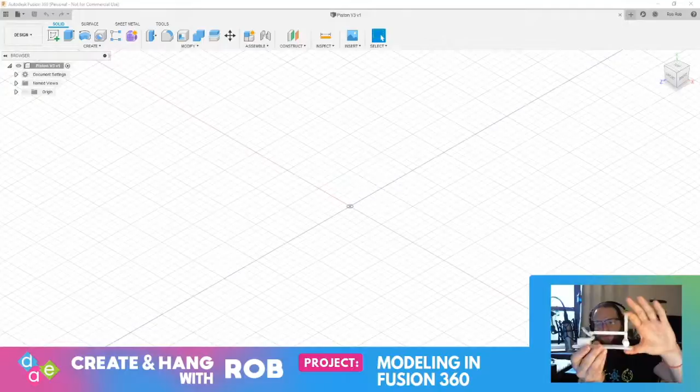If you weren't here on Tuesday, I'll quickly show you the linkage arm project I had done. I 3D printed it, and that worked quite well, as you can see. The only thing is, of course, I didn't leave any tolerances for the pins on all the hinges, so not all the hinges work properly.

Like this linkage arm can come off. The pins that were supposed to hold that in place don't fit. The pin for the hinge on the little box didn't fit. I tried to drill it out and then hammered it, and it broke. Only one side of it is in, the other side of the hinge comes loose. But overall, it works pretty well, and I'm pretty darn happy with that.

So I just wanted to share that with you. But I completed that on the first try. I'm on my third try of trying to get this piston mechanism to work.

If you can see on my screen, it says Piston version 3, because yeah, this is pushing my skills a little bit. So we're going to try again. I have a new idea. On Tuesday, I had tried to put this together and just did not think through the design very carefully, and it was completely wrong. I mean, the design was terrible. There's no way in a million years it would have worked.

I have an idea for today. I think we'll be successful.

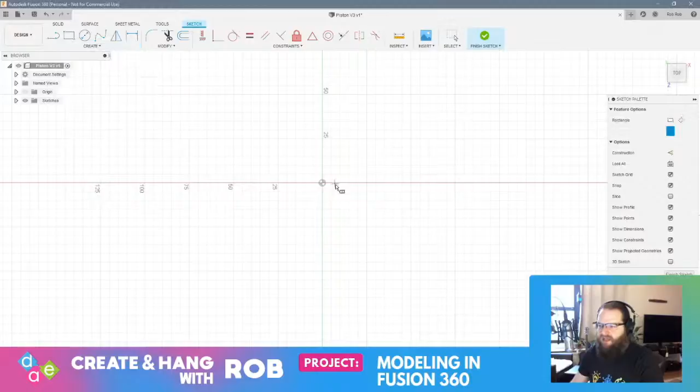So we're just going to get started with a center point rectangle, and we'll do 200 - well, actually, we'll do that as 50, and the other is 200. I want it in this orientation. Okay, perfect. And then what we're going to do is actually round off the edges with circles this time instead of doing it with the arc tool, so I know it's perfectly rounded. That's just another way of doing the same thing that I was doing with the arc tool. But all right, we'll press pull this 5 millimeters.

One thing I learned last time that's really interesting is the press pull tool doesn't just extrude. If you hover over the icon, it says press pull modifies existing geometry using offset, extrude, or fillet. So depending on the geometry of the object, push pull may not necessarily extrude—it may offset the face or fillet the edge, which is interesting. There's actually a separate extrude tool in the create set of tools, so I'll probably use those interchangeably. Extrude will only extrude, whereas push-pull can modify it in other ways. I did not know that, and I don't know if that was always the case, but I thought it was pretty interesting.

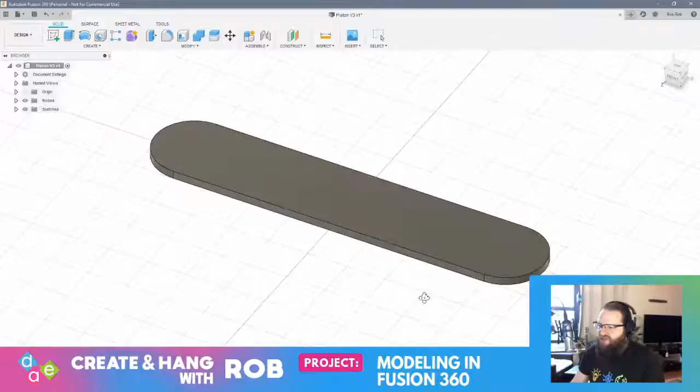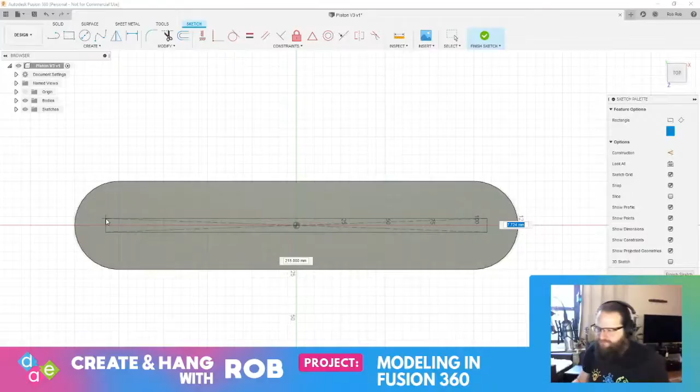So to start, I'm going to do something kind of strange, solely for orientation. I want the linkage arm dead center on this base, with everything else offset. So I'm going to create a sketch on the top of this object using a center point rectangle, basically making a guide. Let me grab my ruler to figure out the size of this linkage—probably 5 millimeters wide in one direction, and 215 in the other. I'm not actually going to use this for anything else; I'll just push-pull this upward about 1 millimeter so I have a guide for measuring everything else. Later I'll push-pull it back down into the base so you won't even see it. Essentially, I need my linkage sitting here, which is great.

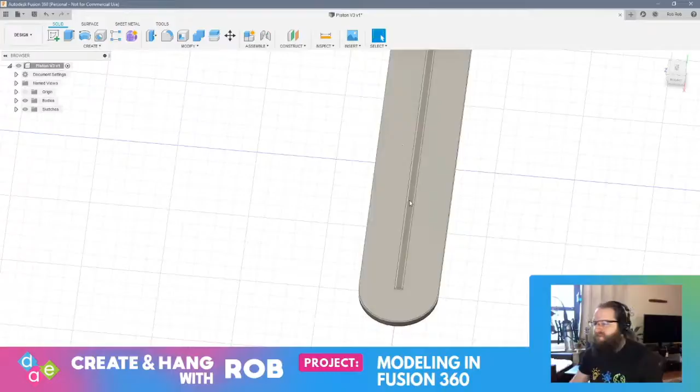The next thing is figuring out how thick I want the wheel to be and my crank. Basically, the wheel will be offset, and this linkage arm will connect to the wheel. This base is 50 millimeters wide, and this piece is 5 millimeters wide, which means we have 45 millimeters to work with on either side—though it'll actually be nothing on this side. I could have offset this and added another linkage, but that seems too complicated. So, 45 millimeters means I could probably make the wheel dead center on this section, 20 millimeters in width. I think that's what we'll do.

Let's get a sketch going here. Oh, my orientation's all weird. Let's get a rectangle—I think I'll sketch a rectangle, that's 20, right? And then 30, what does that look like? So maybe I'll do 20 by 50. That's kind of large, I don't know about that. Let me do 30. I don't know—I don't exactly know what I'm doing right now, I'm just flying by the seat of my pants as usual.

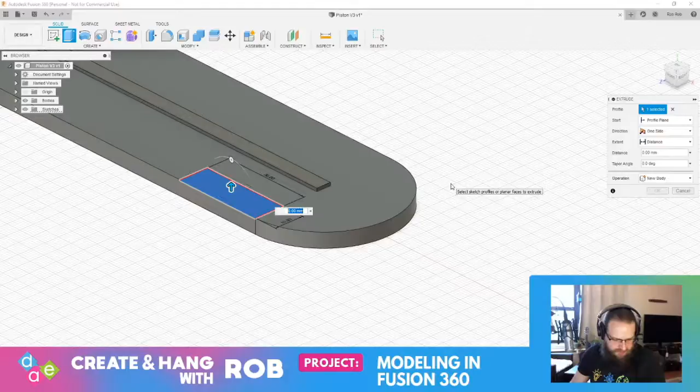All right, here's what we're going to do—change in plans. I am going to make it 10 by 30, and push-pull this upward. I think I want the diameter of that wheel to be 50, so we'll push-pull this up 30, right?

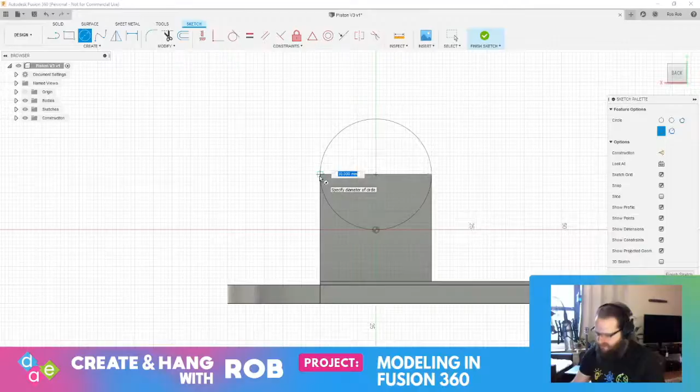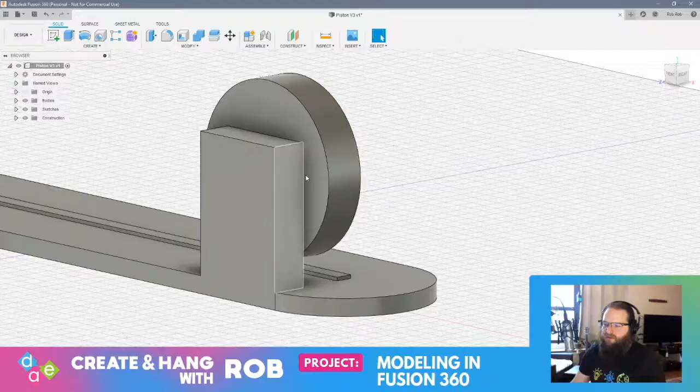Let's bring this out now—10, and I'll press pull this upward. I'm just doing these for visuals, so I can figure out how much space I have. Let's bring that out 12—that's intersecting, so we'll do 11.5, so we have some tolerances. Okay great, so now this can go back down. All right, we should be good here. I'm going to bring this up a bit more as well—let's bring that up 35. Okay, 40. Okay, cool.

Oh, wait a minute—this isn't going to work either. Okay, let's back up. I need a crank to be on this side, and the crank is going to hit the support. So I need to make a cylinder that has a split down the middle, and the support for it is going to be in the middle. That's what's going to have to happen here.

This one is really throwing me for a loop. Let's take a step back. It's a good idea, it's not going to work. Okay, so what we're going to do in that case... it's all right, we'll make this work.

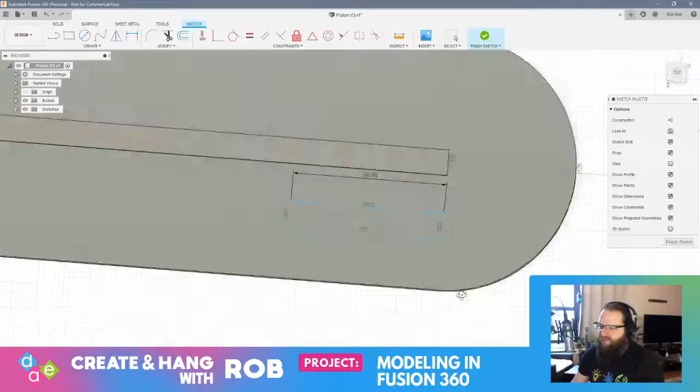So my thought is now, let's make a sketch here. 5 by 30. Okay, cool. And so that's 5 millimeters. Let's press-pull that up 40.

Okay, great. So now, here's what we're going to do. I'm super overcomplicating this design, but I don't really know how else to deal with this. There's probably going to be a version 4 and 5 of this. I have another thought of how we can fix this later on, but we're going to figure this out now. So I think what we'll do is...

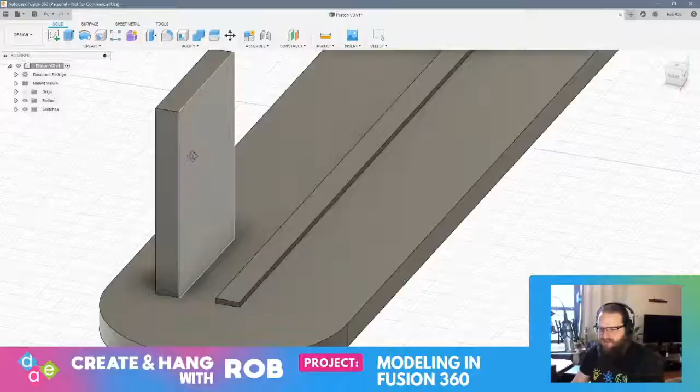Actually, hold on a minute, I'm going to undo that really quickly. Center point rectangle. Actually, maybe we'll redo that. I'll just go with it. Okay, cool. All right, so now what I need to do...

I'm going to just do something here and see if this works. This is challenging. Oh, center point.

Ooh, I should have eaten something this morning. My stomach's grumbling, that's funny. I don't know if y'all heard that, that was pretty loud.

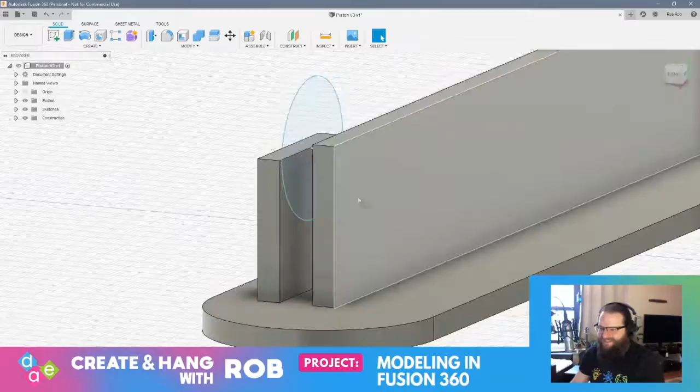All right, let's see. 6.5? Okay, that'll work. Okay.

All right, so, what was it? Oh wait, hold on a second, I need to edit the sketch. I made this too small. Let's undo that.

That's what I needed. Okay, and then I think I press-pulled that 6.5. I remember that from before. So let's see, press-pull, 6.5. Okay. All right, very good. Okay, so now this needs to come up.

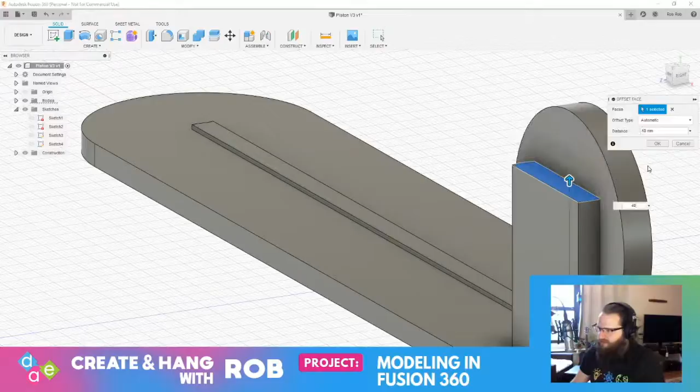Let's bring that up 50. Nope, too much. Let's bring it up 40. 40, cool. All right, so now what I'm going to do...

I am going to... let's see.

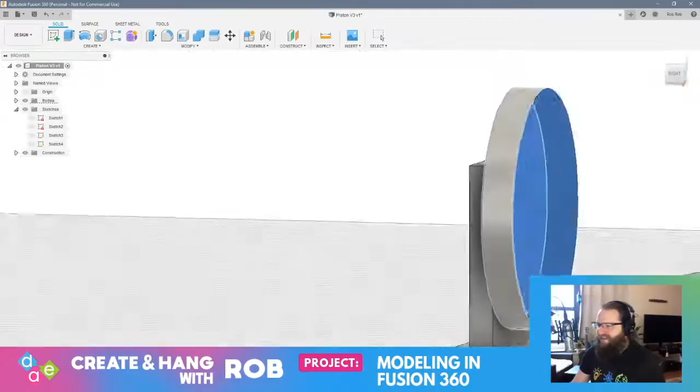I need to make an identical wheel on the other side, and then I need a system of connecting this all together. I think what I will probably do is make a sketch. Okay, here's what we're going to do. We're going to make a sketch on this face, right? And I'm actually going to turn this sketch back on so I can get the center point of this circle.

And we're going to make a 10 millimeter hole in this, okay? And actually, we're going to make it 10.5, because we need to model with tolerance and not be stupid like I usually am and model everything 100% to scale. Minus 5, I think that's all the way through, right? I think that's all the way through. Let's take a look, I'm just going to move this. It is. Okay, great. All right, so now this should not be too hard.

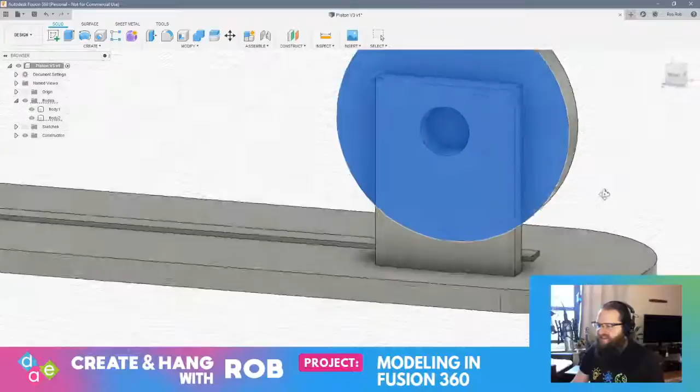So now what I'm going to do is I'm going to make a sketch on... let's shut this sketch off. I'm going to make a sketch on this face of this shape. And yep, we're going to sketch there. And then we're going to use the center point circle and make a 10 millimeter circle. And then we'll be able to pull that.

Finish sketch, let's turn the sketches back on. Now I'll be able to take this shape, this face rather, if I can select it, press pull this. That will work. All right, beautiful. Okay, great, so that's good. So now this body should contain that. Very good. Okay, awesome, so now we're going to use the...

Actually, I have an idea here. Let's sketch this. Center point circle, and we'll do a 5 millimeter circle. Actually, we'll do 5.5 because we need to leave a tolerance. And then I'm going to press pull this, minus 6. Right? So now we have...

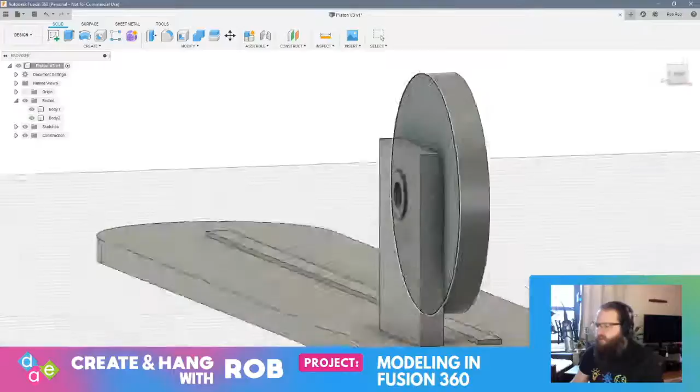Essentially, what we're starting to make is the same pin mechanism that we've used for our hinges. And... you know, wait a minute. Let's stick with this plan. I'm going to stick with this. Okay, cool.

So here's what we're going to do now. All right, we're going to make a sketch of a 50 millimeter circle. And I'm going to press pull that, whatever I press pulled this, which I think was 6.5, so they're even.

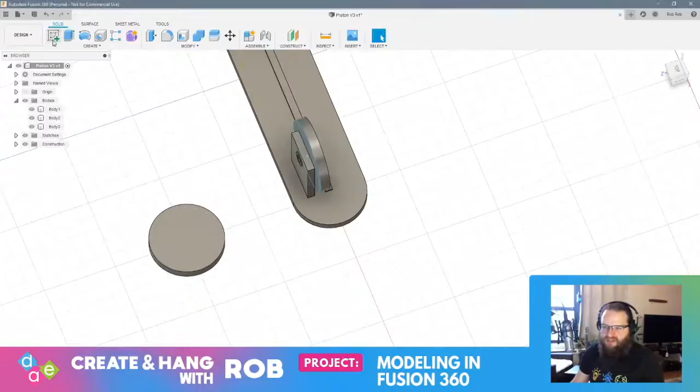All right, and then I'm going to sketch on top of this. And then we're going to make a center point circle that's 5 millimeters in diameter. And then we're going to press pull that 6 upwards.

And so now what I should be able to do is align this edge with this edge and then basically press it inwards. So let's do that. Let me just move this up and rotate it. Okay, I think we're making a bit of progress.

I'm going to have a wheel on either side of that support. One's going to have the linkage, and the other's going to have a crank on the opposite side that you'll be able to turn by hand. I could probably set it up where there's a wheel, the support, and then just a crank on the other side without the other wheel. That's probably a more efficient design, but I want to see this one through first and see if it makes any sense.

We're probably going to go through a few iterations of this. I probably won't torture you all with sticking through every version of this, but we're going to at least try and put this to bed today. And as I make iterations of this, I'll print them and show you all.

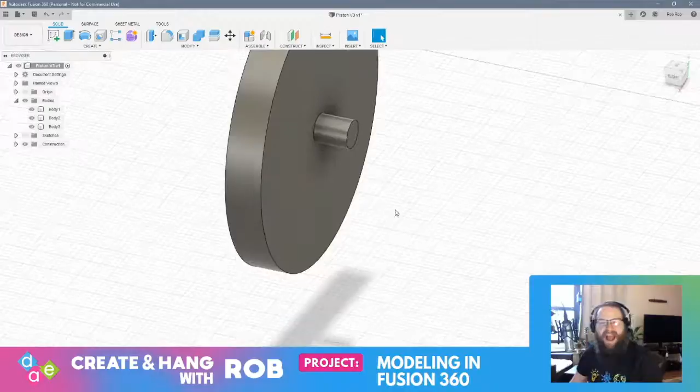So we need to use our alignment tool to get the center point here with the center point here. There, okay, very good. Okay, and now that's good. And now we can take this and we can move that in.

Too much. Negative, I think 5.5. It could sit all the way flush, but I'm just going to leave it for now. Actually, let's get that in just a bit more.

All right, cool, awesome. So there's our wheel. Cool, awesome, and the hinge design works. So now we'll be able to have a crank on this side that moves completely freely and won't get hit by anything, and a linkage on this side that moves completely freely and won't get hit by anything either. So I feel pretty good about that.

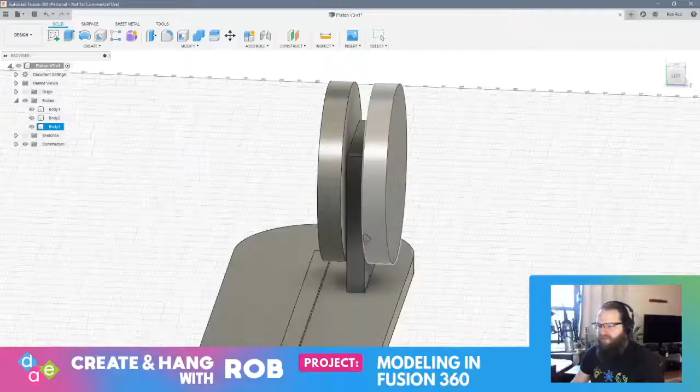The only thing that I probably messed up is... yeah, this might be a problem. No, this isn't going to be a problem, this will be fine. I was thinking how we were going to attach the linkage arm to this wheel. Essentially what I think I'll do is I'll actually pull a pin out, and then the linkage will fit on that, and then it'll have a cap to hold it in place. And that way nothing will obstruct the inside of this.

So save this, looking good so far. Let me just grab a swig of water. All right, let's continue on.

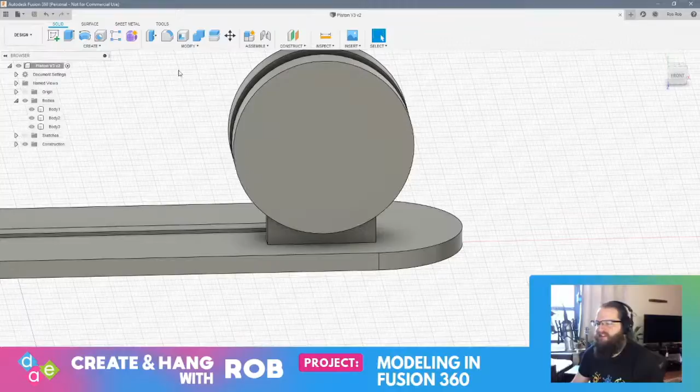So I think let's make the crank, and I'm just going to make it on this end. I don't think it's going to be anything fancy. Yeah, it's not going to be anything fancy. I'm just going to have a little cylinder coming out of this with maybe like a little ball on the end. That's all, I don't want anything too fancy.

So let's make the cylinder here. We'll make it... that's too close to the edge. I think I want to make it 10 mil in diameter, so we'll do it. I'll make it 5 mil, whatever. Or, you know what, I don't know why I'm going crazy with this. Let's just make it 8 mil.

That's fine, and then we'll have that come out. Let's have that come out. I'm just looking at my ruler here. 30 mil. Right, little crank. And just for fun, we'll throw a little sphere on the end of it, right, just like that.

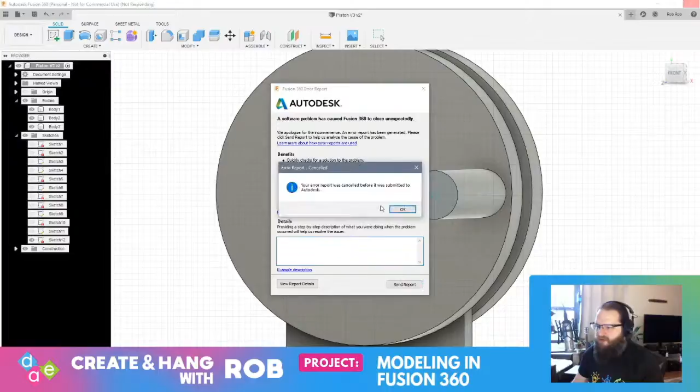What's happening, Fusion? Oh, error report. Oh, okay, Fusion 360 crashed. That's nice. Let's get Fusion 360 back open. That's never happened to me before. Interesting. All right, these things happen.

I wonder why, you know, I have Premiere open. Maybe I'm... let me close Premiere. Yeah, all right, we'll go back to Fusion here.

All right, close. Okay, so let's open our design. We should have it, that was Piston version 3. We should not have lost anything because I did save it right away. Just a good lesson in making sure you save everything all the time.

All right, let's try this again. Save it again. That is so perplexing. When I used the sphere tool, I had an issue. All right.

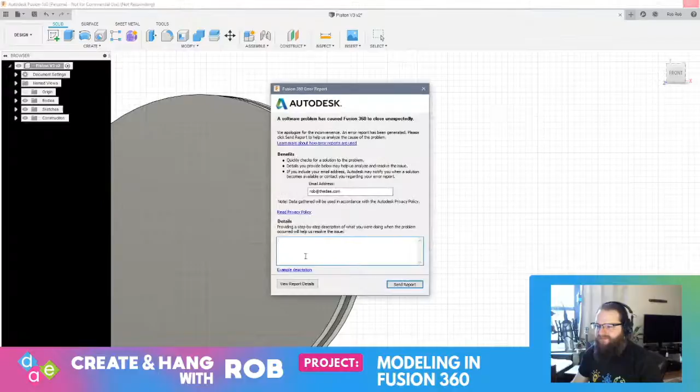All right, let's try this one more time. All right, so we'll bring that out 30. All right, let's try the sphere tool again and see if we have a crash. If we do, it's going to crash again, watch. Yep, send report, all right. That's so weird, using the sphere tool is crashing Fusion 360.

I don't think that's anything in my model, my model isn't particularly complicated. I don't know what this is. Okay, all right, oh, it's just a confirmation that I sent an error report. Okay, let's let this close, and then we'll reopen Fusion, and let's see what happens. That is so weird.

All right, so note to self, no sphere tool for today. Let's go ahead and reopen our file, and hopefully this doesn't continue to happen. So, Piston version 3.

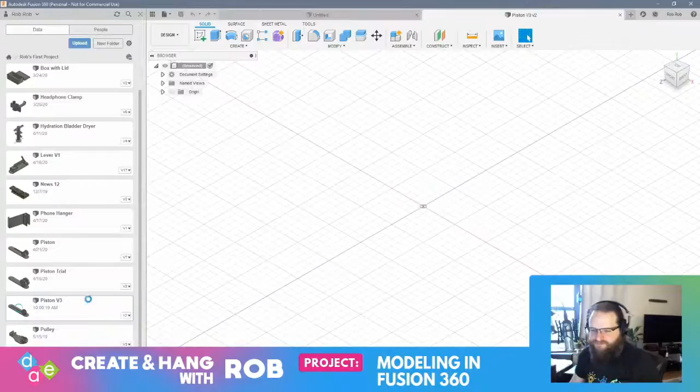Okay, so what we'll do in this case then, to just make the little crank look nice, we will just fillet the edge. That's so perplexing.

So perplexing. All right, so we'll bring that out to 30. For the time being, I'm just going to leave it. That looks entirely too long, by the way. Let's bring that in to 25. All right, fine, that's good. That's fine for now, I'm okay with it.

Great, so now I think it's time to work on the linkage. I think the linkage arm is going to be... I was going to make it 5 mil, but maybe I'll make it 10 mil. Maybe that makes more sense, and then we can make the pin that goes through at 5. Why don't we do that?

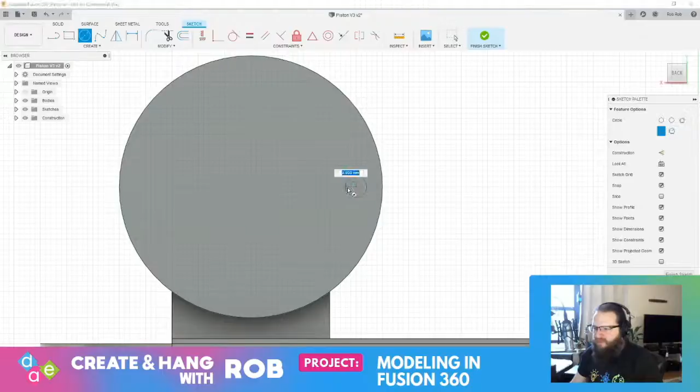So we're going to sketch on this side. I think I have an idea of how this is going to work. We're going to make a 5 mil piece here, and then we're going to press pull this out. I'm going to press pull this out 6. I think that'll be fine. Okay, great.

All right, and now I'm actually going to get rid of this. I don't need this anymore. -1, all right, fine, that's gone. We don't care about it anymore. I don't know, that was weird.

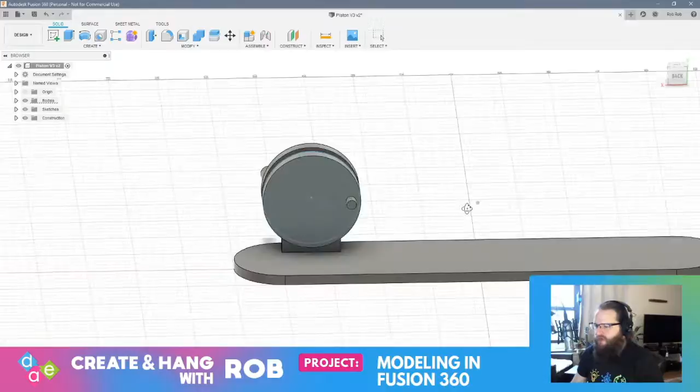Okay, so let's make our linkage arm. I don't know how long it needs to be, but we'll figure that out. So let's save this, and let's get this going. I'm going to sketch down on the... nope, that's not the right plane I want to sketch on. Okay, so let's go ahead, I'm just going to make a basic rectangle. It's going to be 10 by, I don't know, 100 for now. We can change the size of it as we need.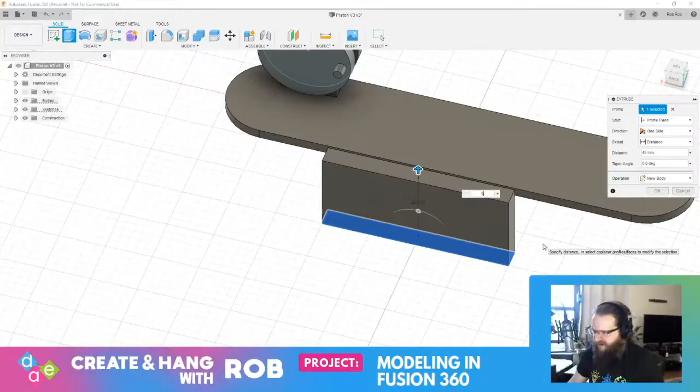Okay, and then we will press pull this and make it 5 mil in, not 45, but 5 mil. Right, great, and then I want to sketch on top of this, and then I want to make a hole. It's going to be 5.5. Great, and that's going to get pushed through so we have a hole. It's going to be nothing fancy about this linkage, but it's going to work. I know that for a fact because it worked really well on my little box mechanism, the lever box mechanism. Okay, all right, great, so that's there.

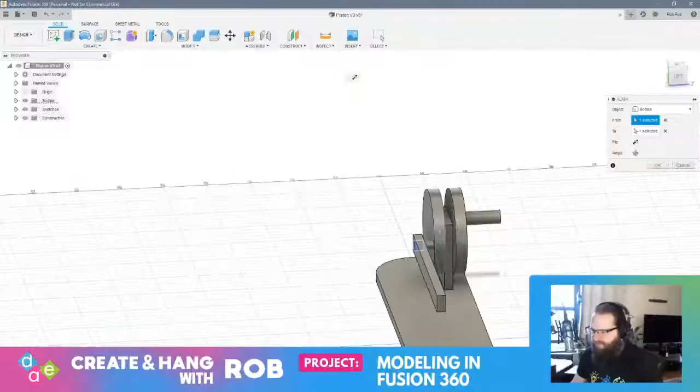Let's move this up and rotate it the right direction. All right, and now what we're going to do is align the center point of this circle with the center point of this circle. And there we are, beautiful. Okay, so that's good, now we can grab this. And of course I should be naming all this, but I'm not. 5 mil in, let's bring it 5.5 in.

Great, okay, awesome, so there's my linkage. I'm going to actually rotate this so it's all... because it's going to basically come down at an angle and hook up to something here. But for the time being, let's get the pin that's going to hold this into place set up.

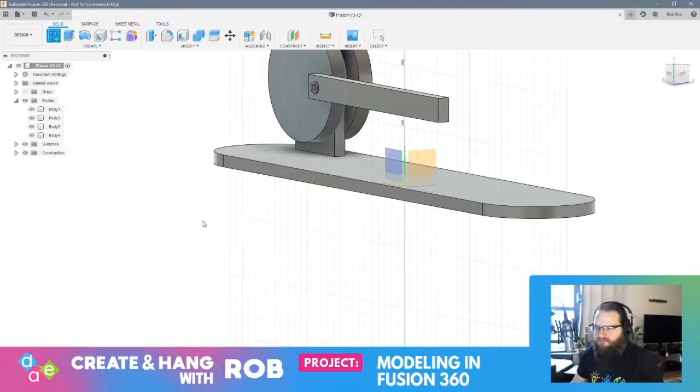So we're going to sketch on this face and make a center point circle, and we'll make a 3 millimeter, and we'll have this go in 5 millimeters. -5, there we are, okay, so now we've got a little spot there. So let's design a pin. This is something I've done 100 times, and I should not have too much of a challenge. I'm not sketching in the right place. There we are, okay, so we'll put the pin on this side. All right, let's see, let's see what we got.

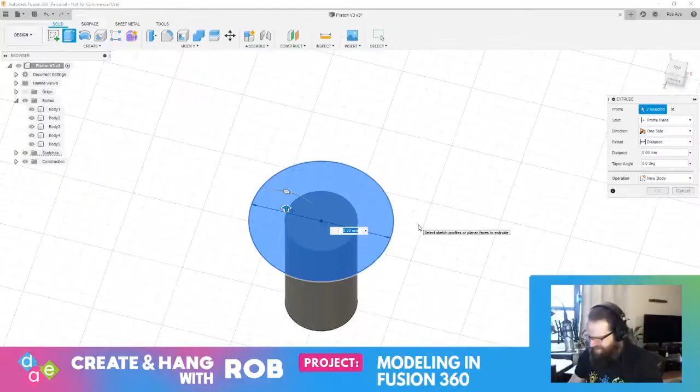We made that 3, so we should make the inner diameter of that 2.5. So I'll make a 2.5 mil pin, and we will press pull that up 5. And then we'll make a sketch on top of that, and we'll use a center point circle as always. We'll do a 5 mil top to this pin, and we can grab both these faces and come on now. Press pull, and we will make this, I think 3, nope, we'll make it 2. And then, of course, we will fillet the edge 1, and we've got a pin.

Beautiful. Let's get this into place so we can see how it looks, and then we'll move on to the next thing. I also think I want to round off this using an arc, but we'll get there in a minute. So first things first, let's get this pin oriented correctly. So let's bring it up and rotate it 90 degrees.

Great, and now we can use our Align tool. I don't know how I survived working in Fusion 360 without the Align tool. I mean, it's necessary. It's not knowing what I'm doing. Great, looks like our tolerances are good. All right, we're going to move this in.

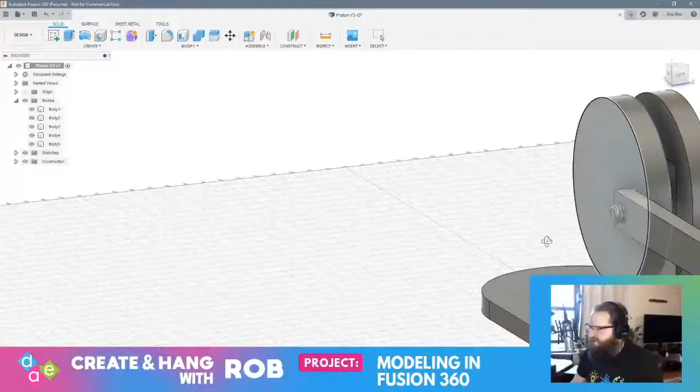There it is. So, one issue that I overlooked, very stupid. Look at the diameter of that pin, the arm is going to fall right off. I should have made it... I should have made the top of it 10 mil. So let's edit the sketches. We should be able to edit the sketches and not have a problem. So let's see, so if I just shut all these other sketches off.

Let's try this one. Let's edit this sketch. So the top of this needs to be 10 mil. Finish sketch. Let's see if that updated this accordingly. Oh yeah, how cool is that? Is Fusion 360 the best? All I needed to do was update the sketch, and it completely updated my model.

Love that. If I was doing this in Tinkercad, I would have had to go back and ungroup everything. It's just not even the same thing.

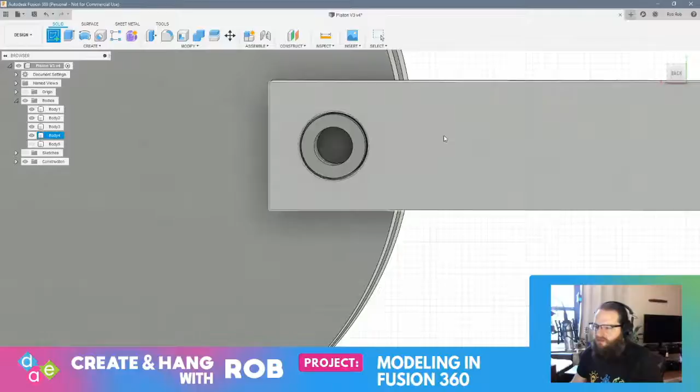So I want to just curve the edge of this because I want it to look nice. Let's do that with the arc tool. We're going to get our 3-point arc. Let's see how we're doing on time here. Oh, we're doing great. There it is. Finish that sketch.

Let's get that sketch turned on. And then basically we just need to press pull this way. Beautiful. And now if we turn our pin back on, I think that looks pretty nice. I think that looks great. Okay, very good.

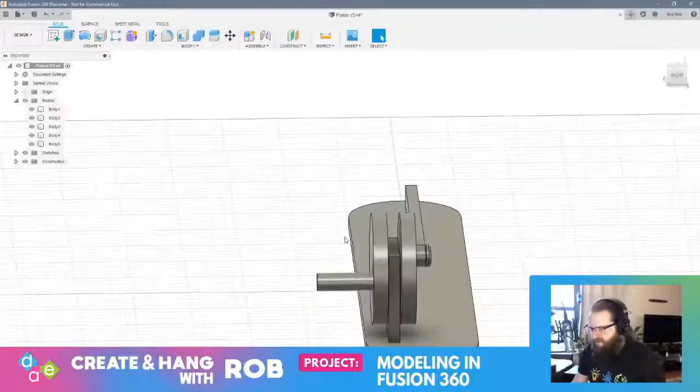So, offset crank. This crank turns, that turns the wheel. This arm can rotate freely around this pin because we've modeled it with tolerances and there should be very little friction. Now what we're going to need to do is figure out the piston side of things. And I have absolutely no idea how that's going to work.

So I think we need to save this with a description so I can come back to it. We're going to call this crank complete. So that if I royally mess up the piston, which I guarantee I will, I'll be able to come back and jump back to this point and we can give it another shot.

Okay, so first things first. I think I want to extend this arm. I'm going to need to rotate it. I guess I should figure out what the piston's going to look like before I do anything with the linkage. So I'm actually going to pull this back a bit and just get it out of the way, and we'll deal with that later.

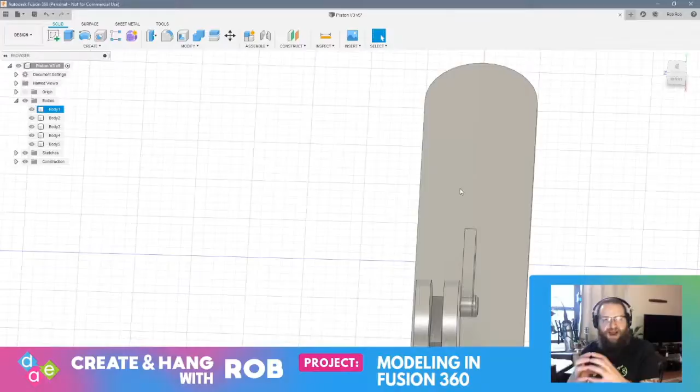So the piston is going to need to be dead center, and it's going to need a housing, right? The piston needs to be within a housing, otherwise it's just going to flop around. So I think what we'll probably do is make like a tube of some kind that's on a little stand, and then we'll put the piston inside of it and hook up the linkage arm.

Okay, and I think the piston has to be kind of large in diameter, because if we think about it, well, I don't know. I really don't know. I have no idea. So let's just start playing around with this and see what we can do.

So we need to make a sketch on here. And I think maybe what I'll do is create a rectangle that will be, let's call it 20 by 75. I don't know. Okay, finish this sketch. All right, and let's bring this up like 5 mil.

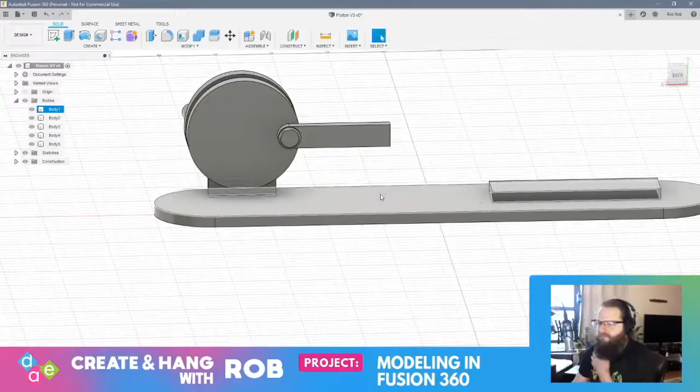Okay, now, because I'm thinking that the piston's going to travel a bit of distance given the diameter of this circle. The diameter of the circle, I think I said, is 50. So there's basically 50 mil of travel. Because if you think about it, from this point to this point, this will be the piston all the way at the top, and over here will be the piston all the way at the bottom of its stroke. So it should be 50 mil of travel.

So this probably is bigger than it needs to be, but it's fine because I can actually press pull this negative 25, right? And now that should represent—although I'm not going to do that. Let me leave it the way it is for now.

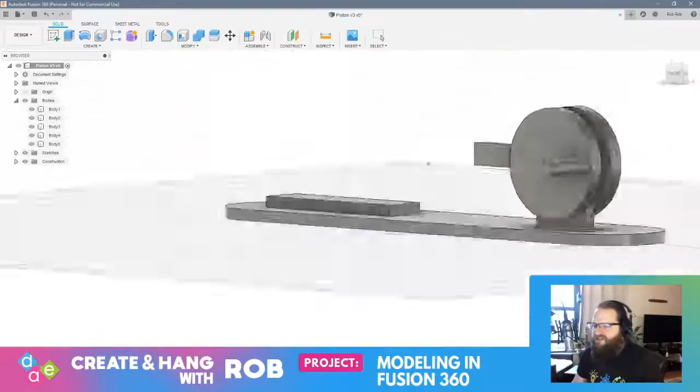So I think we need to design a tube that the piston will sit in. The way I think we're going to do that, let's sketch on this face, right? And I think I want the piston to be, I don't know, that looks close. I have no idea.

50 millimeters, like a 40 piston, 40 millimeters in diameter. That seems kind of large. I think like 25 is better. So, 30. Okay, finish sketch, right? So now I can basically press pull this.

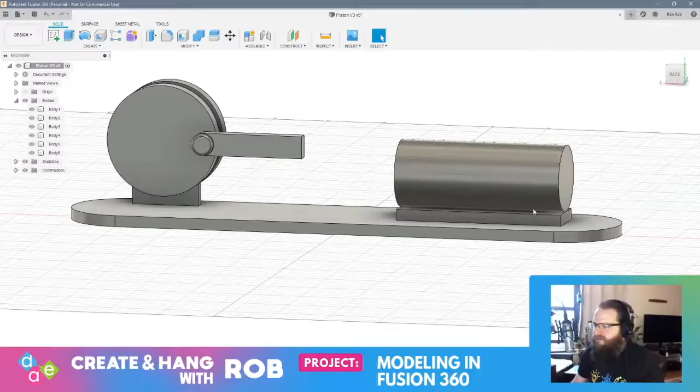This direction 75. Okay, and then I can make a circle in here. 25.5, right? And then we can press pull this, right? So now essentially we have basically like a tube that the piston is going to sit in.

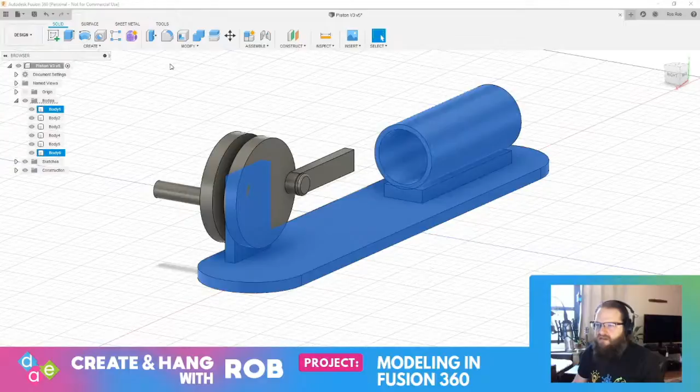Right, and I feel like maybe I want to press pull this up one. Right, so they're like sitting together. Let's group these two things together. Oh, so this and this need to get grouped together. All right, let's combine. All right, cool. So that's now, I mean, who knows how well this is going to work, but all right.

So now we need to make... I almost think I messed this up. Let's take a step back for a minute here. I think we need...

When the piston is all the way forward, I think we want this to be completely level. And then it pulls back. Yeah.

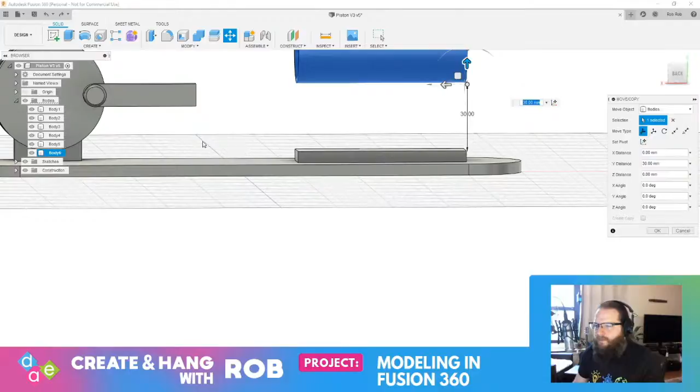So I feel like I need to bring this up. And I think I can figure that out. So 25... and I don't know. Let's see if we can figure this out. I know there's actually an easy way to do this.

Oh, I know what we can do. Let's use our alignment tool. So we'll basically grab the... oh, man. I can't grab the center point of this. Oh, come on.

Oh, bodies. Alright, no, that's not going to work, I don't think. Let's see. Oh, it did. Wow, look at that. Okay, so I basically now have this tube, right? All right.

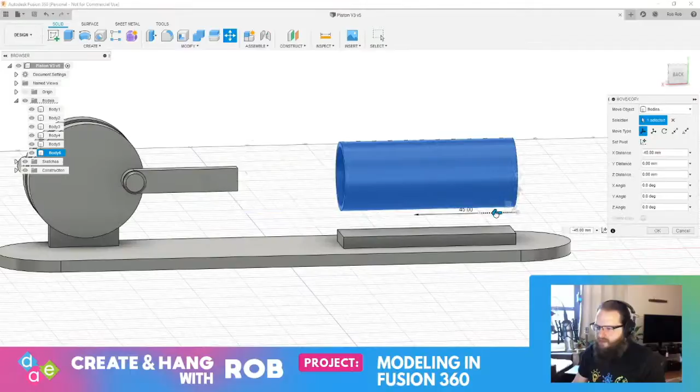Huh. Let's just save this. And then we can move this up. Right. And... oh, man.

I feel like the tube that the piston is sitting needs to flare out, almost like a bullhorn, because there's going to be this articulation of this linkage arm. And I think if this is so narrow, it's going to knock into it. So, I don't know.

Yeah, I'm not sure. I'm really not sure. The other thing I should have done is... I probably should have set this up with the piston all the way back. I don't know. I don't know.

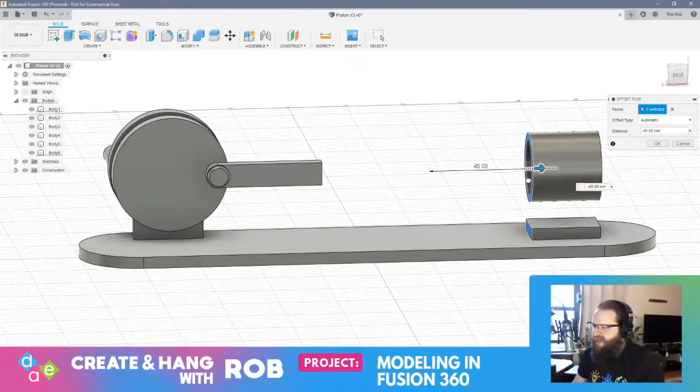What I'll do for the time being is get this out of the way. This is where I need to figure out how to simulate the motion, because if I was able to do that, it would make my life significantly easier. Because then I could actually demonstrate the motion and see if it actually works. One of these days I'll figure out how to do that.

So we're going to make a sketch. I'm not going to... I'm just going to make a sketch over here, sort of off to the side. And we're going to make a 25 mil piston, all right? The piston is just a cylinder. I'm not going to put any piston rings or anything of the sort. I think I said I was going to make it 50. Right? There's my piston.

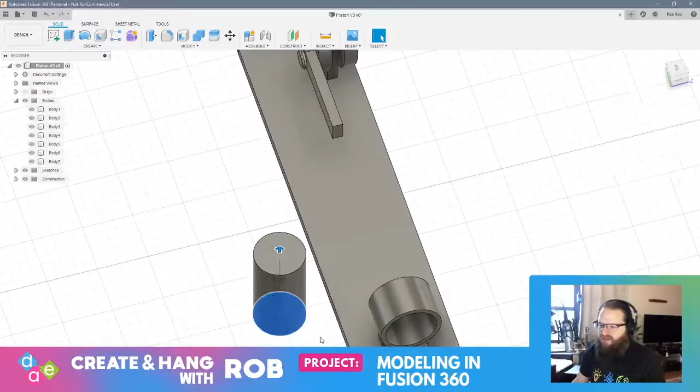Oh, you know what, actually? I'm going to redo something here. Awesome. Okay, so I think what I'm going to do is sketch on top of this and use... okay, I have a great idea for how this is going to work.

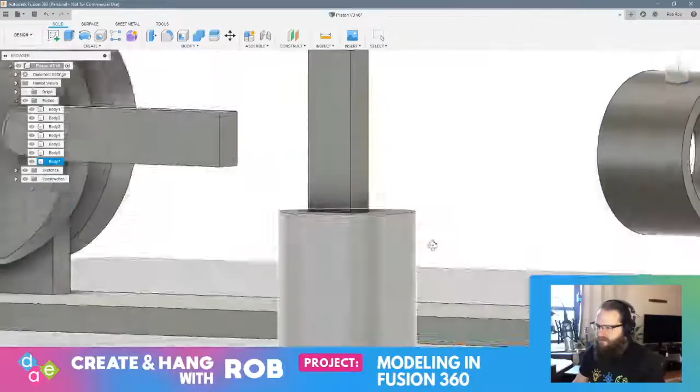So, 5 by 10. Okay, great. And then we can push-pull this. Maybe even more, let's make it 30. Start like that. Okay. So, let's see if this works. I mean, this is just an experiment for the time being. So,

Oh, wait a minute. All right, let's just see what happens here. This is going to need to be tweaked, I'm sure. Oh, I probably should analyze the construction of an engine a little bit more closely. But let's see what we can do here.

So, I'm going to start by aligning... how are we doing on time here? All right, we're getting there. This with the center point of this. Okay, cool, right? And there should be tolerance. I should have modeled - there should be a bit of tolerance here, so that's fine.

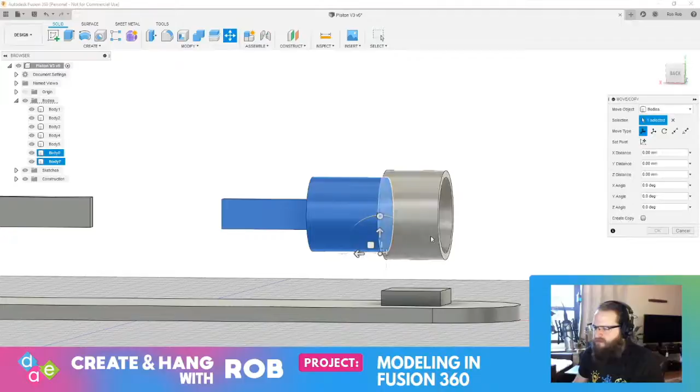All right, so now let's bring this object in. All right, so let's call that the top, right? And I think what we'll do is let's bring... yeah, I'm going to need to make a bunch of adjustments to this, which is fine. It's all good.

Whoa, I don't want to do that. Let's extrude instead of press pull. There we go. Okay.

Obviously, I messed something up in the connection of this. Obviously, I messed something up. So, I think I need to scooch this linkage over a little bit.

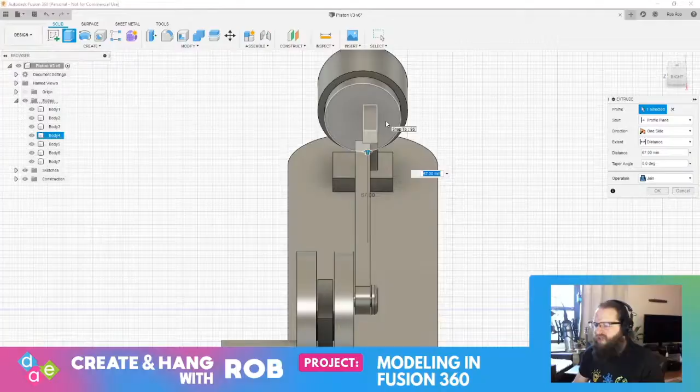Yeah, let's take a step back. All right, yeah, so this drawing needs to get scooched over a little bit more. So it was here. I think it needs to be here. Right? Let's see if that works.

Just gonna make it 20 for now. I mean, I don't know exactly what needs to happen. All right, let's move this again. Move, bring it up, rotate it. Okay.

We'll grab our center point here.

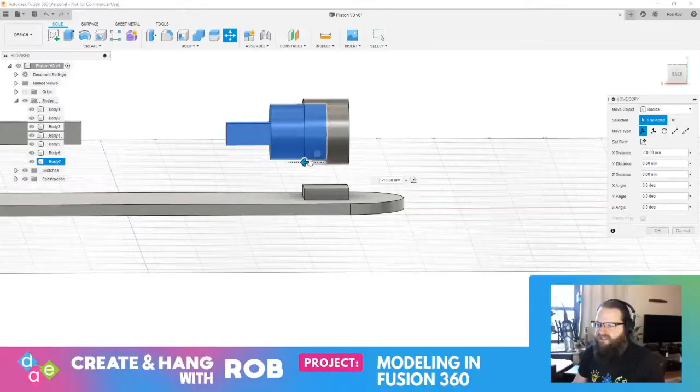Okay, cool, and now this... I'm going to extrude that, because when I press pulled it, everything got all out of whack.

Okay, so that's still not quite right. You know what, let's undo this. I'm not even going to do that sketch right now. Finish sketch. Let's get this all aligned first. Let's see if I can do this. Align this with this. Beautiful.

And now, all right, so I really should make... We know that this is 50, and I think I made this 25, so let's make this 50. No, I need to extrude. So I need to bring that out another 20. And we'll bring this edge out 5.

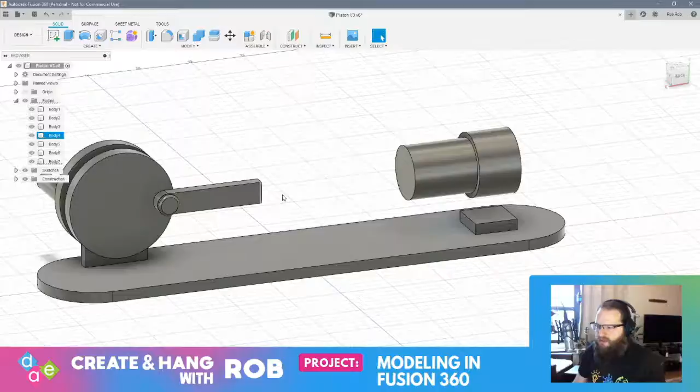Okay, great. All right, so now that should be... All right, let's bring this... No, I want to extrude this. Let's bring this out. Okay, cool. All right, so now that should work.

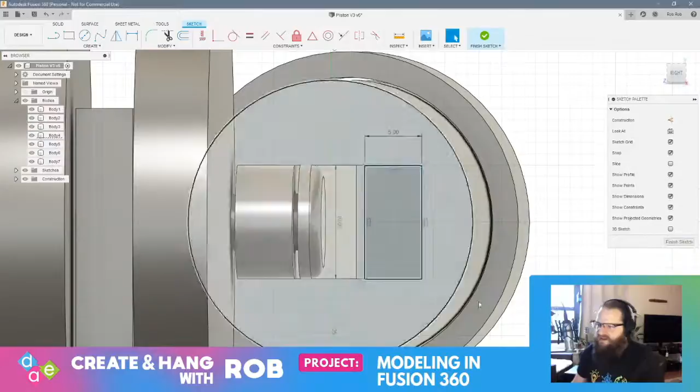Good. All right, so now what I'm going to do is sketch on this face. Right, and I'm going to sketch here and make a 10 by 5. Great. Finish sketch. And then this can get press pulled out minus 10. Nope, 10, wrong direction. Is that enough? Nope, let's bring it out 20. Beautiful.

Okay, so now I'm going to probably tidy some of this up shortly. 8.

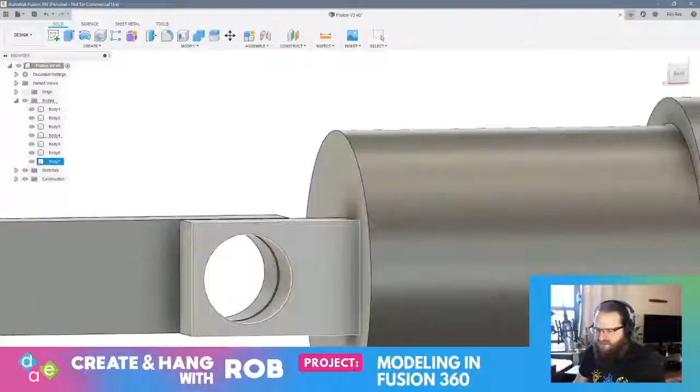All right, so now we have a hole through both of these. I'm actually going to extrude this so it comes back a little bit, it's too much material. Let's see. Okay, cool. And so now we'll design a pin mechanism to go through this, as we've done in the past. Great, great, great, great. Okay, so that's looking pretty good.

And then we'll figure out how this piston is going to be set up. I do think we're going to need to flare out the receiving tube for it, so just save this. Okay, let's see, we have about 10 minutes left here, so let's see if we can wrap this up. So let's create a new sketch.

Okay, we said that was 8, so we will make this 7.5. Okay, and I don't know how far that needs to go through. This is 5 and this is 5, and I think there's a millimeter in between, so we'll make it 11. So, 11.

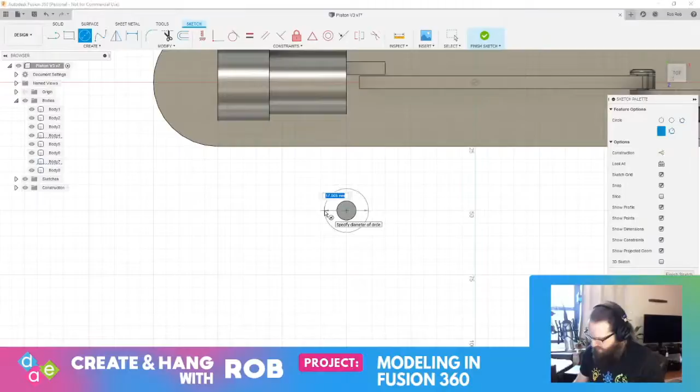Okay, and then let's sketch on top of this, and we'll make this 10. And once again, we'll make our pin mechanism 2. And then just flatten this off with our fillet tool, 1 millimeter. Done. Okay, great. So let's align this, and then I will do the other part.

And I think this should go... I don't think it really matters. It probably does, but for the time being, I don't think it really matters. Okay, cool. So let's align this with this. Cool, beautiful.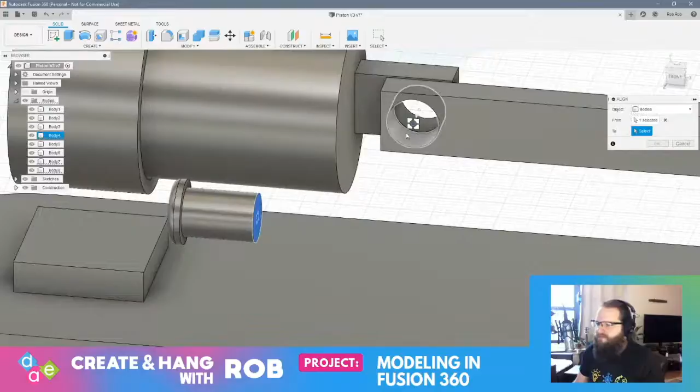Negative 10.5. All right, great. That looks pretty good. I'm going to just press pull this out, 0.5. There we are. Okay, beautiful. There's our linkage. Okay, this is coming together. This will probably function, but not well.

We'll do a 5 millimeter hole here and press pull that in. Negative 5. Okay, cool. So let's see what happens. Let me make a pin. New sketch.

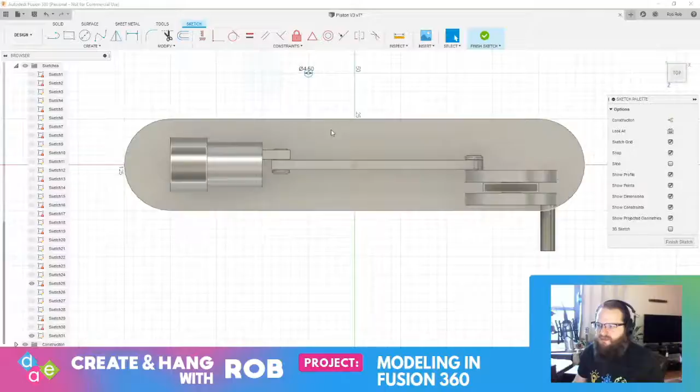Okay, I don't know why that sketch is on. Shut that off. All right, so this is going to be, we made it so it'll be 4.50. It'll be, whoa, it's not visible. That's dumb. I do dopey stuff sometimes. All right, so 5 millimeters.

Great, and then we'll do the same thing we did on the top. Sketch, center point circle, 10. Press pull that up, 2 millimeters. And then grab this outer edge and fillet by 1. Great, and we have our other side of our pin.

Let's go ahead and move this. 9. I'm going to have to go back and name all this at some point, but in the interest of time, because I'd like to get pretty close to finishing this up today, which I probably won't, we're going to move a little quickly. So 90 degrees, let's use our alignment tool. So align, I'm going to grab this and align it with this. There we are, great.

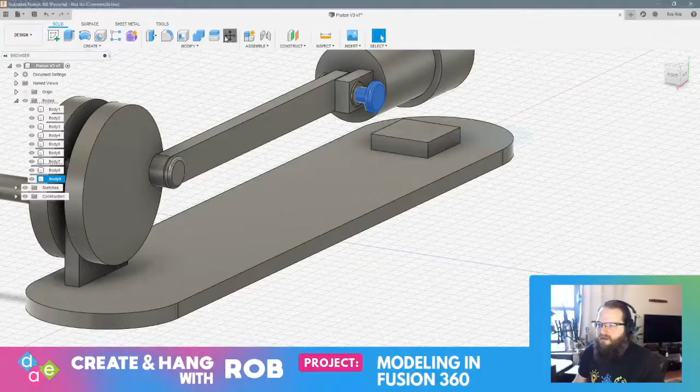And now we can move this in. All right, great. Okay, cool.

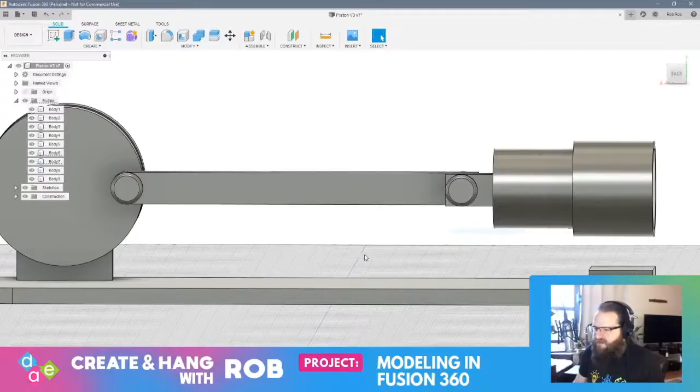All right, so I think what I'm going to do now, I do want to flare this out a little bit. So I think first thing I'm going to do is I'm going to extrude this back 5 millimeters, right? Okay, then I think what I'm going to do is... Oh man, I need to think about this a little bit more because I did some things wrong here. It's fine.

All right, cool. So we have to think that this is going to move 50 millimeters back this direction. So what I'm going to do... Let's actually bring this all the way back. Okay, cool. And then what I'm going to do, check this out, let's see if this works. Let's create an offset plane 50 millimeters back this way, right?

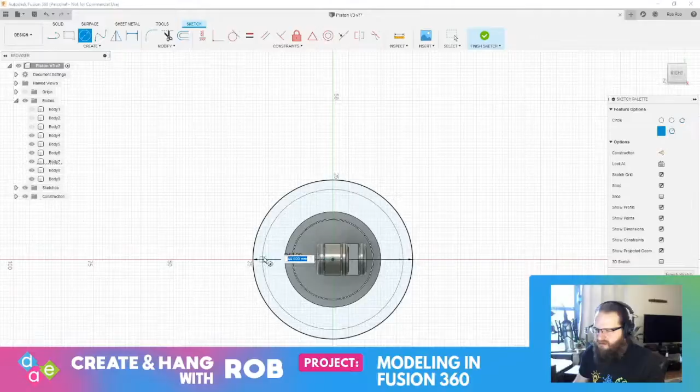Awesome, okay. And then I'm going to sketch on this new plane. I'm just going to shut a few things off. Center point circle. And a second center point circle. 45. Okay, great, that's a finished sketch. Okay, now the question is, can I select this and select this and use the loft feature. Profile 1, profile 2.

And profile 2. Cancel. Maybe this won't work. I thought this would have worked. But let's see.

There's another way to do this which I don't want to do, which is drawing arcs and using the revolve tool. I don't want to do that. I want to use loft and profile 1.

Loft cannot be changing the input, swapping profiles for rails or a center line. Okay. Center line. Cancel. All right, so let's try this again. Maybe we can do this in another way.

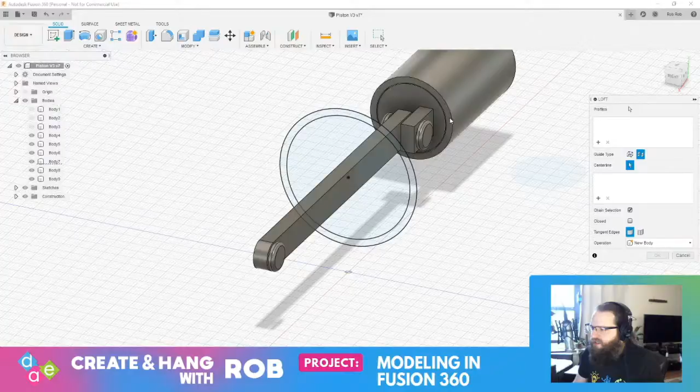So it's going to be center line. So the profile is going to be this, and the second profile is going to be this. And then the center line is going to be...

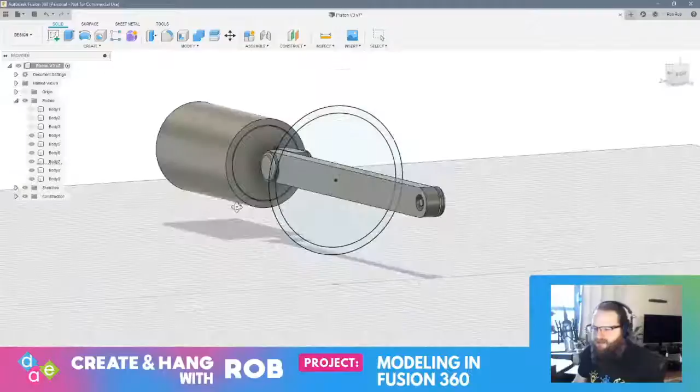All right, that's not working. All right, let's do this. Let me try something really quick. Press pull. Right, so now I have this ring.

And what if I create a new sketch and see if that works? Let's create a new sketch on this face, right? And basically... Okay, so I now have two new sketches. Can I select?

All right, wait a minute. So this, I'm going to get rid of this body. And then I should have... Where did my other sketch go? Did I mess that up? Oh man, I messed that up. Okay, all right.

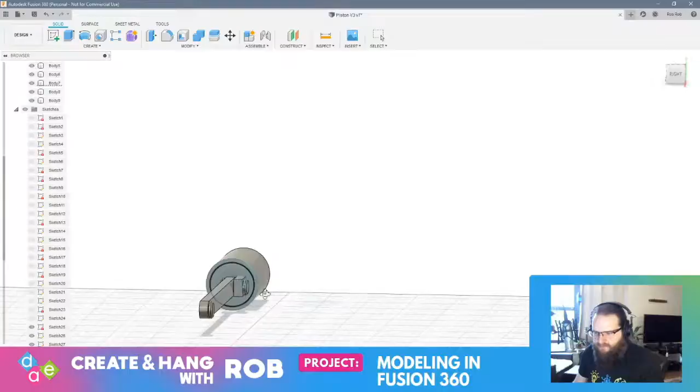Can I get rid of this? Actually, let's get rid of this. And can I get rid of this? Cool, all right, cool. Okay.

Okay, so what if I offset this 50? Okay, right, that makes sense. And then let's sketch on our new plane here.

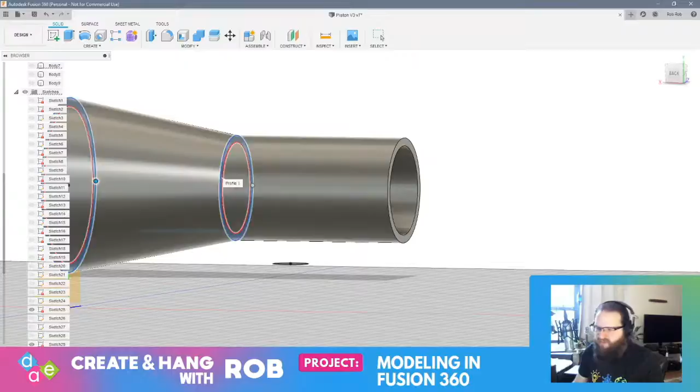Okay. So I should be able to loft. That's what I wanted to do. Perfect. Okay, great, that's it.

So now, this, and this. Oh. Oh, I didn't want that face closed. Hold on. Almost, all right.

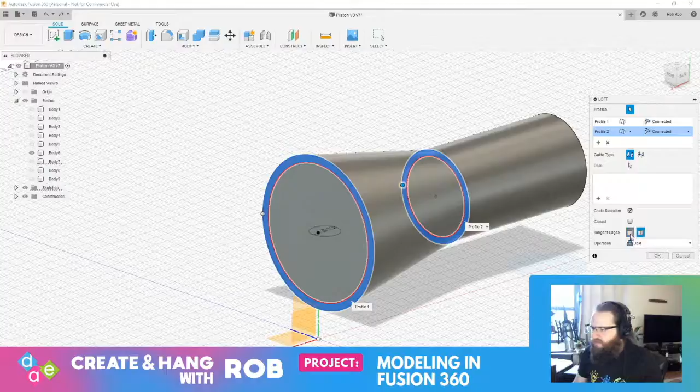Oh, maybe I selected the wrong one. I want just this and this. All right, let's try this again. I don't want it closed. Cancel. All right, maybe I need to...

All right, why is that being weird? Can I press pull this 1, right? And then maybe this will work. So if I grab this and then this. Is this closed? That's open. Okay, and this, loft.

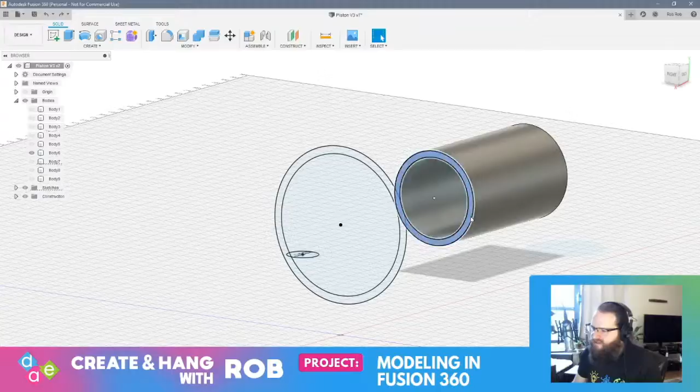Why is that not working? This is super annoying. Let's try this again. All right, if I can't get this to work, I think we're going to pause for today, and I'll resume this next time. But we definitely made more progress than we did.

Right, that's great. The question is, can I press pull this? Okay, so now, that's not at all what I wanted to do. I want this to be hollow. All right, we're going to undo that.

Undo all this. All right, so let's turn all the bodies back on and just quickly review what's happening here. So, missing one body. Okay, so, and then I can shut the sketches off. So let's just save this. So I need...

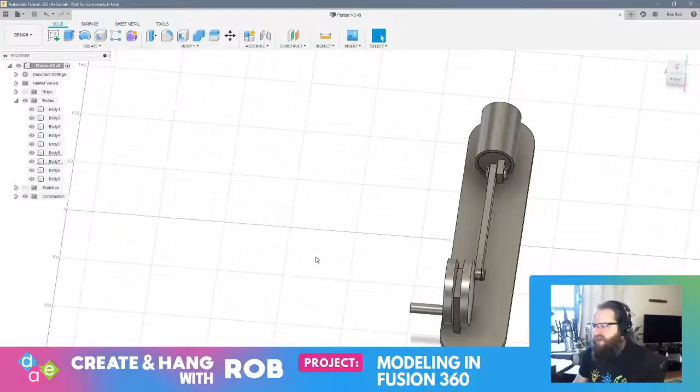Maybe I don't need to have that flare out. Maybe I can just leave it. But at any rate, this is definitely an improvement. I know that this wheel should crank with no obstructions, and this linkage should be able to move as needed to allow the piston to move in and out.

So I think that's a pretty good breaking point for today. Thanks so much for tuning in and bearing with me while I figure this out. Like I said, this is my third attempt at making this. It's probably going to be a fourth and fifth. I'll modify some things once I print them and test them.

But I think now that we're modeling with 0.5 millimeters of tolerance across the board, we should be in better shape with getting all the pins to fit properly. I'm also making the pins slightly larger. I was making them really small before, which is a little fragile. So we're making all the pins for the hinges a bit bigger. That should help.